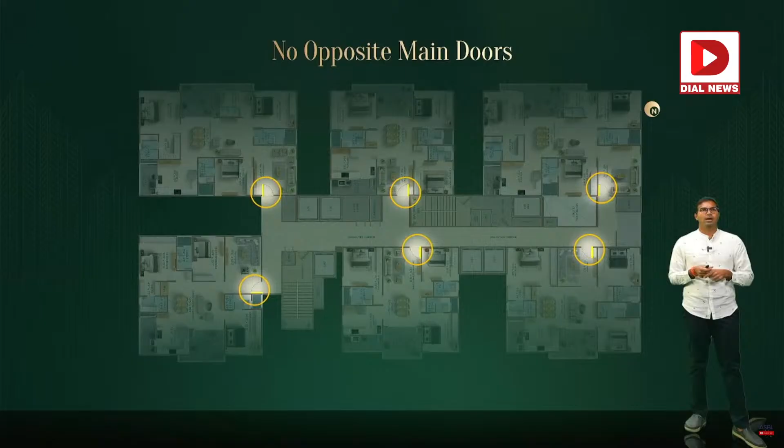Then we went to the next key aspect, where people are talking at a floor plan level, at a unit plan level. What are the key things which came up during our focus group studies and one-on-one interviews? These keywords emerged: lighting, ventilation, carpet area.

Let me share a story also. Most of our customers, if you look at the demographic and behavioral data, have traveled world over, mostly working in the IT sector, and traveled abroad internationally. So in our research, one question was: what is a good building for you? What is your aspiration? We did A/B testing, showing multiple images, and across various people, many picked buildings which were tall and had a glass facade - that was their aspiration. Another question was: which is your most favorite city? The three cities which came up were New York, Singapore, and London. When we asked what it is that you like about it, people said: tall buildings, glass facade, which looks sleek and tall.

So that's when we thought, okay, if this is an aspiration our customers have, then let's plan for that. How can we deliver on that? That's how the entire concept of curtain wall came.

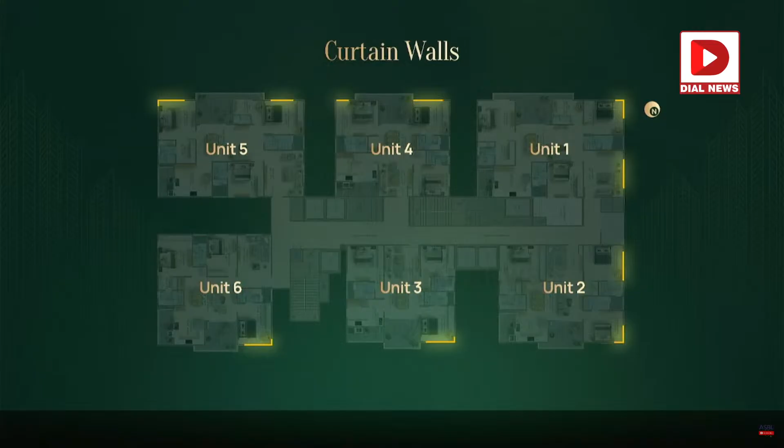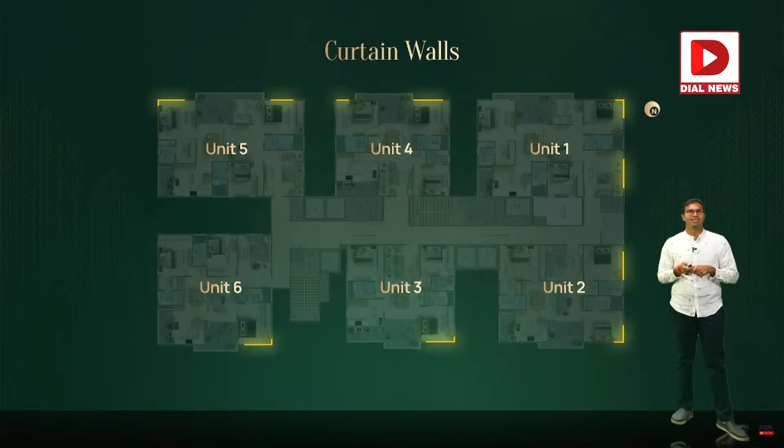So this is how the yellow line, what you have mentioned, that is where the curtain wall is coming in each of the units. In fact, in most of the units, it's coming in a minimum of 2 bedrooms, right? So that really enhances, in some cases it's coming in the kid's bedroom, so that really enhances the light and ventilation in those places.

Another important aspect which I wanted to pull up, which we have improvised in Broadway, again coming from product research and adding to the ventilation of the space as well. A taller space, you're going to feel much more breezy. You're going to feel much better aerated also.

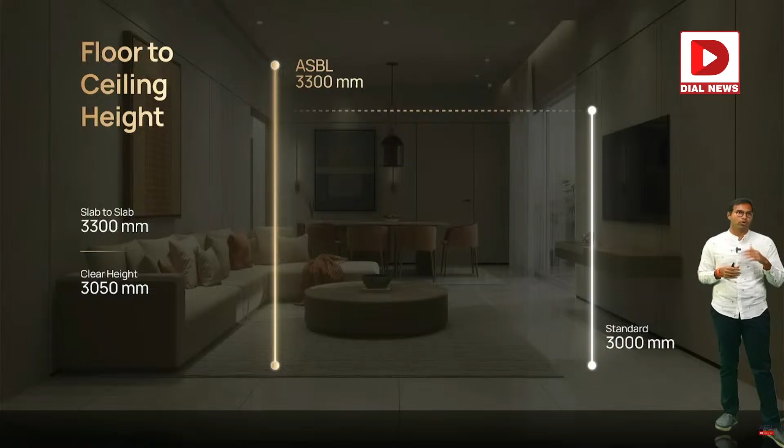So we have improved the entire slab to slab height. Standard, most of our competition is giving 3000 mm as a standard height from floor to floor. In Broadway, we have increased by 300 mm, that's almost 10%. So the floor to ceiling height is 3300 mm.

That is gross, so you can see slab to slab. Clear height is going to be 3050 mm. There's going to be a slab thickness of approximately 150 to 175 mm, and then another 75 to 100 mm of flooring and whatever mortar. And then you're going to have a clear height of close to 3050 mm. So that's roughly around slightly about 10 feet, if I'm not wrong.

Again, this also adds to the entire aspect of the space in your apartment.

Again, with the advantage of curtain wall, what's happening is all the other balconies have been converted into the room, thereby maximizing the carpet. And naturally, because we could increase the carpet, here we could negotiate and increase the balcony size, outdoor living size, which is almost 15% bigger than all our previous projects.

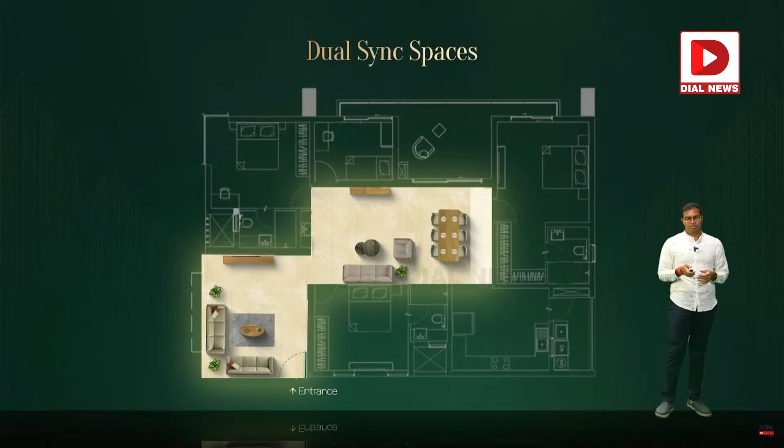Now let's get into the second aspect of the lifestyle grid: practical luxury. As I've mentioned, most of our customers are double income households, so both husband and wife are working, which creates a dearth of time. People have 40 to 50 hour work weeks and still need to manage the house, daily utilities, grooming, and more. So we came up with the concept of practical luxury, where all key day-to-day life utility services should be within 100 steps, within a minute's walk. That's practical luxury.

From our customer research, 82% of our customers are exposed to hybrid work. Some work full-time from home, some do hybrid work. We also have a good number of NRI customers who continue their work in the US, or continue working when they visit here for a couple of months. This has been a key bestseller for us: the concept of co-working space. We've given close to 9,780 square feet of plinth area for this co-working space, split into 2 levels.

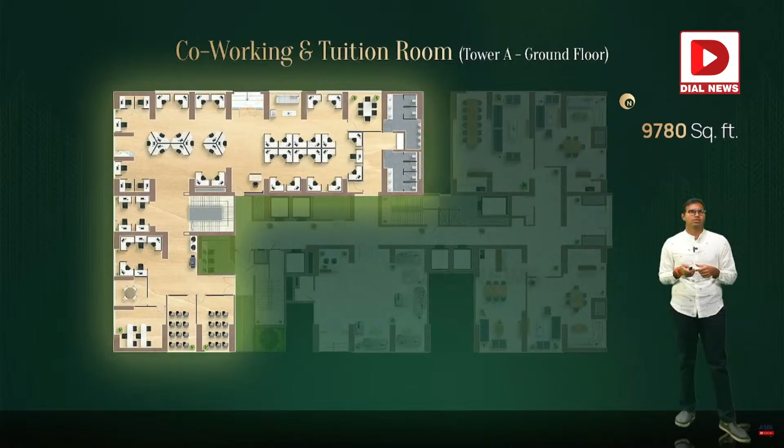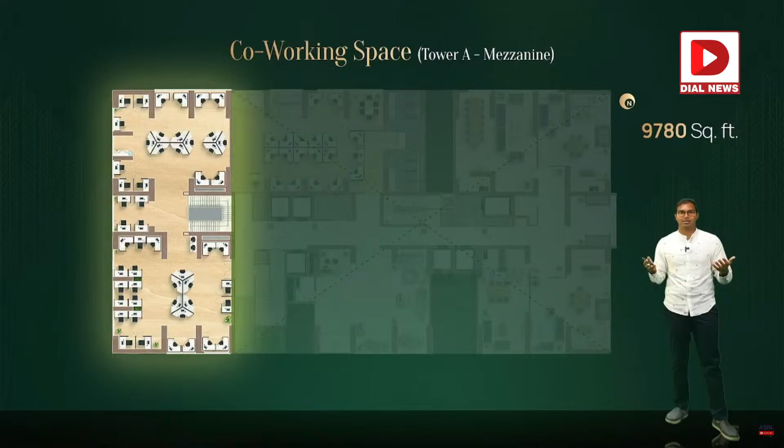This is located in Tower A ground floor, and a small part of it is located in the Tower A mezzanine. You can see the internal staircase, which you can use to go to the higher floor. The discussion rooms and minor level furniture planning will improvise over time, but this gives you a broad perspective of the space and its functionality.

Another important thing our households mentioned, coming mainly from the aspect of both wife and husband working, is that people need a space where they could put their valuables. These days, when people work Monday to Friday and there's a party on the weekend, you have to go to the bank to bring your jewelry, but there's no real time. You come back from office tired, and now you have to go to the bank, which might even be closed at that hour. So all these small things add up to a big pain point in people's lives, and we thought these facilities should be given here.

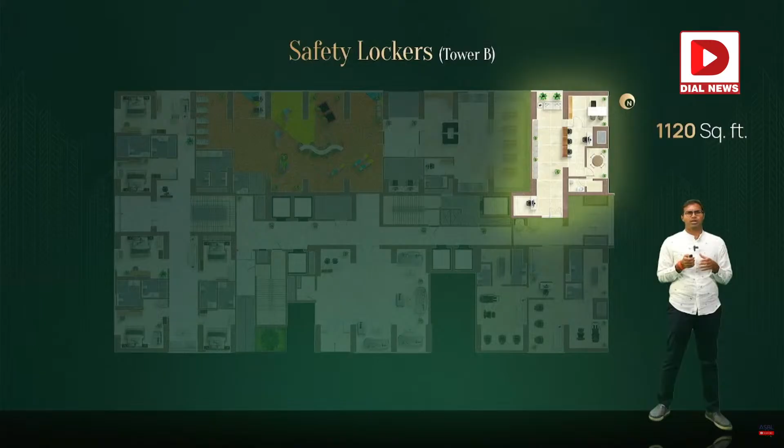This is located in Tower B's ground floor. Again, a very important feature which our customers wanted, especially our women customers, mainly from the point of storing jewelry, and even important documents these days people are storing there.

This again is just a stock image.

Next, another important thing is the entire aspect of grooming. Apart from monthly grooming things like getting a haircut or a shave, another thing we've been seeing lately is the aspect of people getting ready for marriages or any events, like a birthday party. There's a lot of service requirement, especially from our women customers, around saree draping and getting ready for events. So this spa and salon would be totally equipped to provide all those grooming and beauty services.

It's approximately 1,750 square feet, located in Tower B, right behind the bank locker. We are provisioning the space closer to the handover, and we'll be tying up with a vendor.

Whenever there's a party you're hosting or going to, you don't have to plan, go out, get ready somewhere and go. You can simply come here and get ready, or in most cases these service providers even send their person to your home to help you get ready. It's a very small thing, but very important. In fact, we take pride in designing these buildings around this nitty-gritty, just like how any car or phone has multiple features that make your life easy.

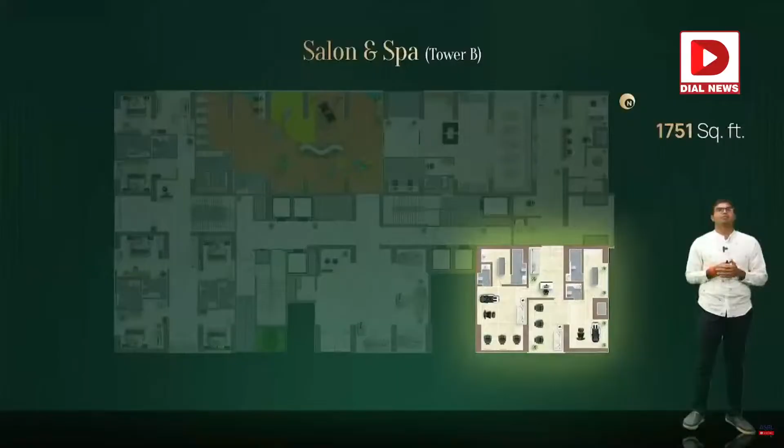Imagine living life without most of these quick commerce or e-commerce apps - how much more difficult would it be? Same way, I think the building as a product should deliver on multiple features, so I would see them more as features than amenities. This is again just a stock image.

Then there's our day-to-day utilities - the most important thing, the supermarket. We've seen that when supermarkets are right on the ground floor, people are more incentivized to come down to the shop and buy rather than ordering from home. You can simply come down - it can be a quick activity - in 2 minutes you reach, buy whatever you need, and go back to what you were doing.

It's approximately 1,430 square feet, located on the ground floor of Tower B. Again, a stock image of that.

Another very important aspect is the entire concept of medical office and physiotherapy. When we were doing product research and talking with our customers, kids get sick, and some customers who were more senior, around 45 plus, told us that their parents stay with them, and most parents have some sort of physiotherapy needs.

Because that service isn't conveniently available, people don't end up doing their necessary physiotherapy activities, which causes a strain on their physical well-being.

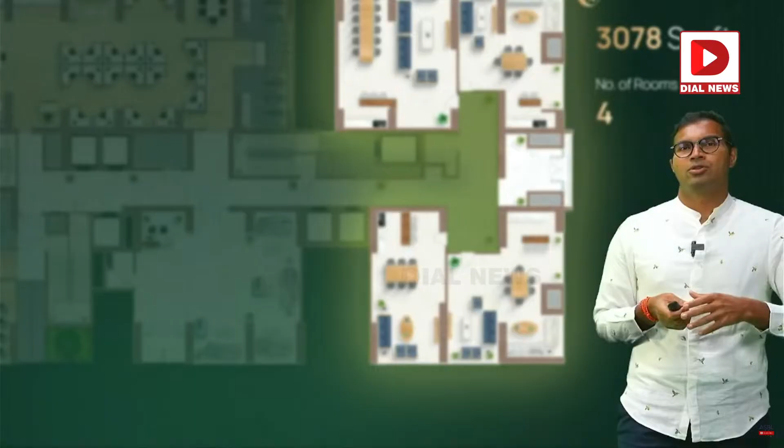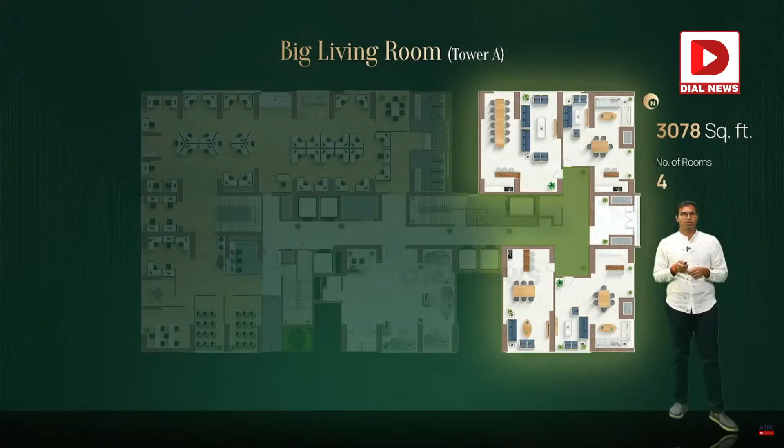Something very important we've realized in this day and age is people are socializing this way - smaller groups but more frequent. Most of us have friends over the weekend, that's how frequent it has become. Unlike in the past where it used to be less frequent but bigger groups, now it's smaller groups, more frequent. People can book this space using the app and use it. We found this could greatly enhance the lifestyle of our community members.

Next, another thing we've seen, as I mentioned in the beginning, close to 64% of our audience group in this project are people in the 0 to 7 year age group. One of the key features we were further talking about for this kid's aspect is the entire concept of birthday celebrations.

If you actually see, the first birthday or third birthday is what most people have told us typically has a larger gathering of maybe 150 to 300 people, but the rest of the birthdays, it's typically a small gathering. Most cases it's just the kids' school friends or the colony or community friends who come over, so frankly it's a 30 to 40 member gathering. This kid's birthday is the most commonly used party situation.

In some cases, the big party hall, or the multi-purpose hall, has some other event, then the kid's birthday party cannot be celebrated. Frankly, it's very small, typically around 25 to 30 people, mostly kids. So we thought, given this community has many kids in the 0 to 7 year age group - and what we've seen is post 7, typically these birthdays come down, and once kids reach teen, parents have told us they typically celebrate with their friends, going out to a mall or something - given there's a significant number of kids in the 0 to 7 range, we gave a dedicated, separate kids' birthday party area.

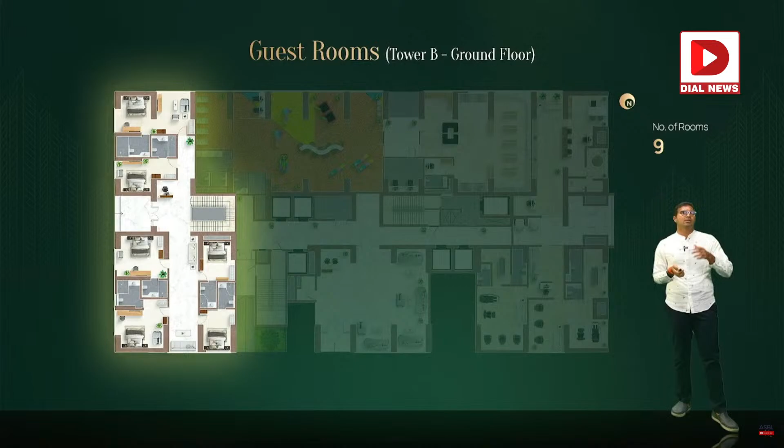So guest rooms are something we came up with a good ratio for. We have 9 guest bedrooms, so availability will be much higher. This is spread across 2 levels, the ground floor of Tower B and the mezzanine. This is the ground floor plan, this is the mezzanine plan. All of them are located on the podium level itself, so that even your guest doesn't need to know the map of the clubhouse or which floor or corner to go to. You just come down and you'll find it. It's very intuitive planning, I would say.

Next, located in the clubhouse, we have a giant banquet hall with a pre-function area and a pre-party kitchen. You can't cook there, it's not allowed from a safety standpoint, but you can do preheating and plating. So this comes in the clubhouse, where you can host bigger parties and have your guests come over.

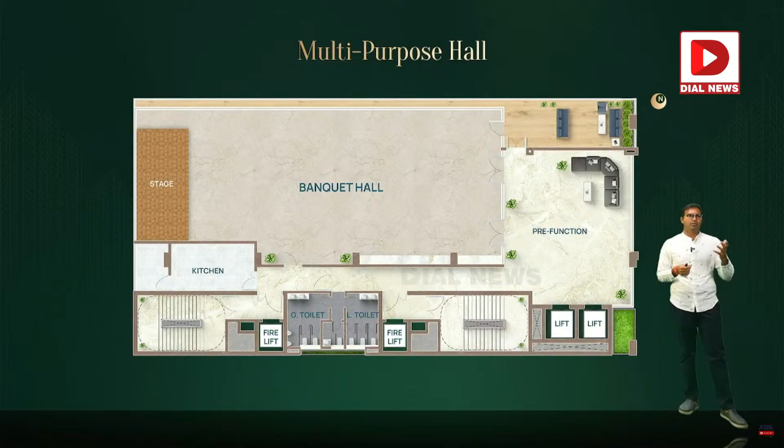Another very important and interesting thing, something which is my favorite in this project apart from the big living room, is a curbside cafe. This was inspired by extensive travels to Singapore over the last 2 years when I started learning more about product design, and also New York, though I haven't been to London much. One thing I saw that usually improves the quality of life in these big cities was the entire curbside experience - curbside cafes, restaurants, with a lot of people moving in and out. The entire vibe gets really, really cool.

So this idea was inspired from my travels to those places, and we have given provision for 2 F&B spaces with their respective kitchens. One is closer to handover, we'll float it out so different vendors can come and take it. This is a curbside cafe, so people are expected to walk to this place from the nearby neighborhood. Even outsiders can access this space, which I felt was very important, because when we came up with the concept of cafes and F&B, it usually premiumizes your space, improves the property value of the area, and even the quality of life for residents.

Imagine you're not cooking that day, you just want to go down and grab something. So you can come here.

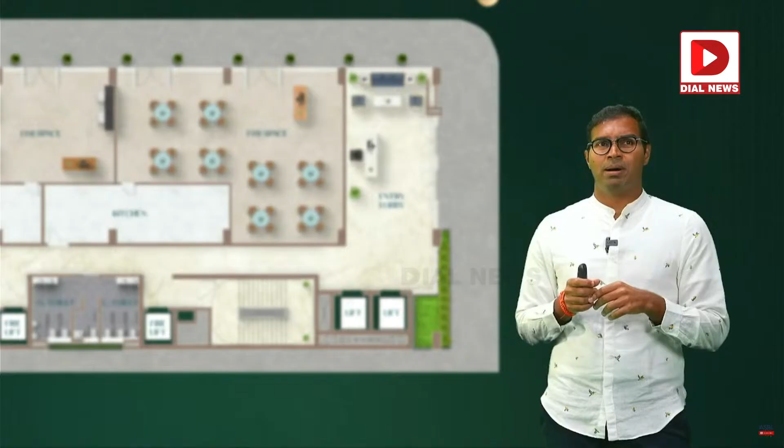But the con we were seeing is that in most communities where F&B spaces are given, all of them shut shop. When we spoke to facility people there, they told us nothing really runs, after 6 months everybody shuts shop. When we looked into why, the problem was store-in-store - meaning they were only allowed to sell to residents. And how many residents will you have? Like 885 families. How will the business run with only 885 customers? It won't run. So that's why we planned it so outsiders can also come and use it, and residents can come and use it too. Even the entire security arrangement has been done keeping this constraint in mind. This is greatly going to enhance the entire street life of that road, not just the Broadway project.

There are a lot of apartments coming up in that road, right? So everybody can just come down, grab a coffee, and then there's co-working space. Imagine somebody working out of that wanted to discuss some idea with a friend or colleague, they can just take this idea into this cafe here. We've seen that a lot of co-working spaces thrive when there's a cafe environment in the vicinity. So the key thing we took in mind is that each space should really benefit the other space. It's not like isolatedly giving spaces.

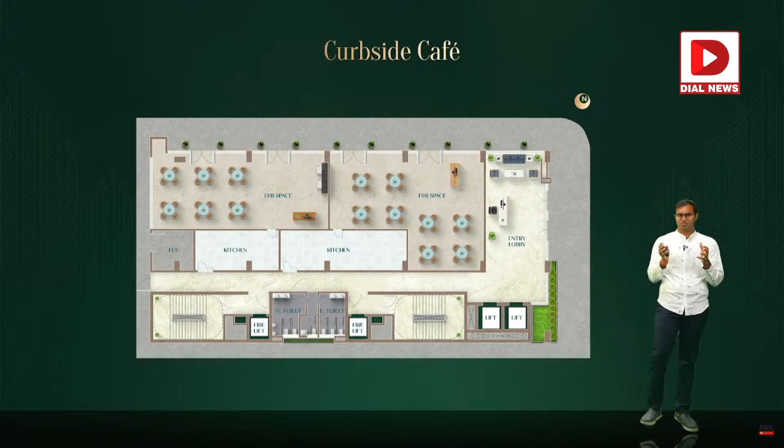So how do we make sure the space gets used? It's not just that as a builder we design the space, hand over and go. If it doesn't get used, it's not really going to enhance the life of our customers. So in our research we thought about how that ecosystem can thrive. Most co-working spaces thrive when there's coffee in the vicinity, and most coffee shops thrive when there are co-working spaces in the vicinity, where upcoming entrepreneurs or people working from home come grab a coffee, or meet somebody here. This is the new trend that's been coming up.

Again, a very important aspect of the social life, the curbside cafe. Here are some stock images of how it looks, and in all major cities in the world, this greatly enhances city life. This would enhance the life in that entire road, the Broadway 100 feet road, because there's a loft coming up there, and opposite projects too.

So everybody can simply walk, they don't even need to take out your car. I'm a big fan of walking neighborhoods. To have a walkable neighborhood, first you need to have a footpath. Second, you need to have activities or spaces where you can do activities. And restaurants are very, very important - they add to the entire buzzing life and vibe of the street.

Here are some stock images to give you an understanding. Next, the important aspect has been the fitness zone. Something very important these days - the entire aspect of fitness and wellness is no longer a luxury. It's now become a comfort, more of a mandatory item. It's no longer a wish list - today it's mandatory. If you look at the earlier audience research we published, majority of our customers are tech workers.

When they're tech workers, there's a lot of sitting, and now they say sitting is the new smoking - it's not really advisable at all. So the entire aspect of fitness and well-being, physical well-being, is something very important. We really wanted to spice up this entire thing, not just keep the monotony.

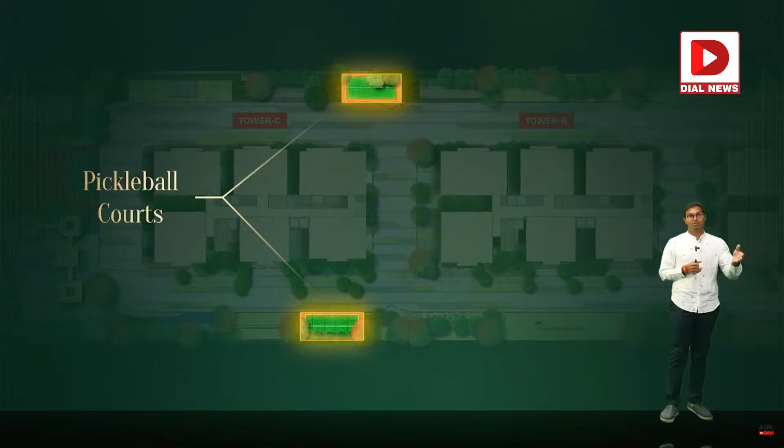In sports amenities, something quite the rage these days - a running trend - is pickleball courts, which are popping up everywhere in different neighborhoods, with people booking them and playing. So we're giving 2 pickleball courts in the community, so people can come down, book and play. When I did research on pickleball, we found that a lot of people were having minor injuries - that was also one trigger to have a physiotherapy studio on the facility. So in case, God forbid, you have some injury, there's a physiotherapy place right there - you can heal yourself in maybe 10-20 days and start playing again.

And then we have 3 indoor air-conditioned badminton courts located in the clubhouse. Badminton is also something a lot of people locally are big fans of, and many people play it. So it's indoor air-conditioned badminton courts located in the clubhouse.

Next, we have cricket nets. A lot of our younger children, especially those who are 7+, have asked for this. Another interesting thing, when we spoke with customers who are 50+, a good number of them told us they played cricket when they were small and left it for the last 20-25 years, and now want to get back to it, probably with a coach to learn something. So we're giving two cricket nets spaces, and then one full-fledged basketball court, something very used by our teen and preteen kids.

This comes on the podium. This is one of the renders of that space.

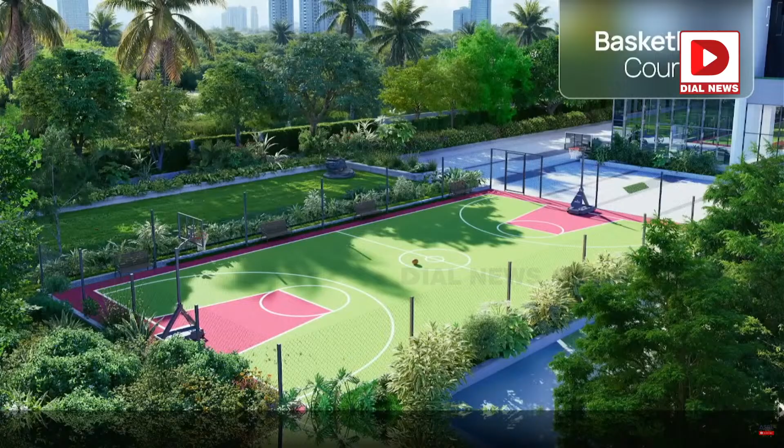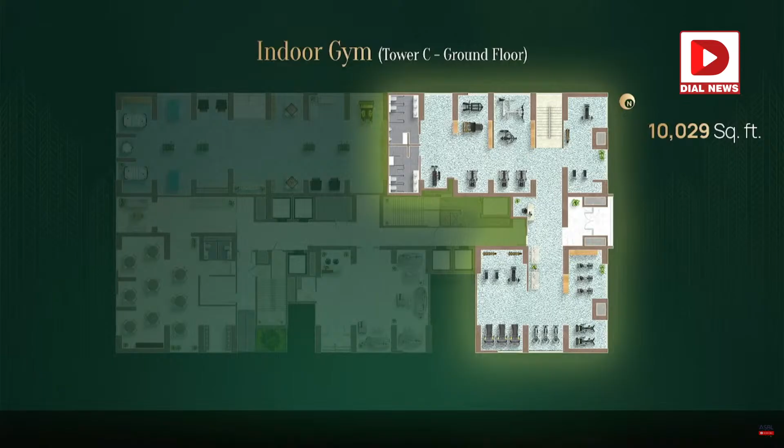Next, you have the fitness zone. This is more like indoor workouts, what you might call typically a gym. The gym is close by, again on Tower C ground floor. It's very important for me personally that we put all the spaces on the ground floor. That's been vital to my design language over the last two years, because there is an 81% drop in footfall the minute the space moves from ground floor to first, second, third, any floor. So we want people to use this, and we want the entire podium level to be buzzing with people and have a great community vibe.

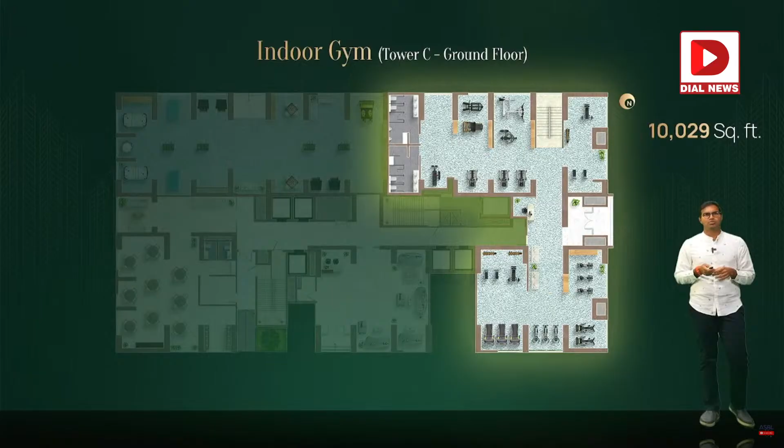So again, this is located in Tower C ground floor. You can just wear your shoes and come in 100 steps and you'll reach this place. It's close to 10,000 square feet, making it one of the largest gyms in its category. It's on the ground floor, and there's another one on the mezzanine level. Both are in Tower C.

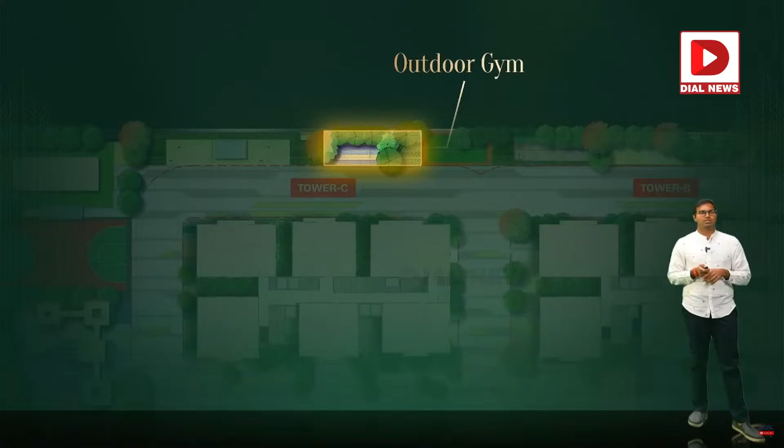Stock image of gyms. And then, something we mainly see our senior age group audience do, an outdoor gym. We've seen people using this a lot, for basic stretches and such. So there's an outdoor gym mentioned right outside the indoor gym, again on the podium.

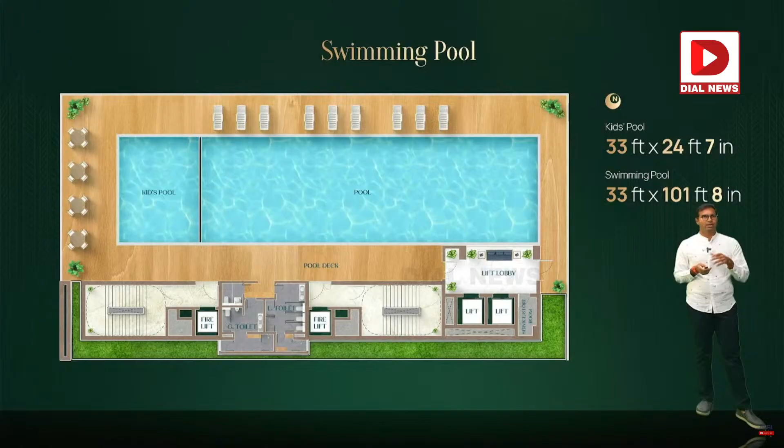Swimming is also a very important sporting and recreational activity. In fact, when we were speaking with the physiotherapy consultant during the research phase, there was a lot of water-based exercise recommended to people to heal themselves. We have a separate kids pool, approximately those sizes, and a giant adult pool which is 33 by close to 102 feet. It's located in the clubhouse. This is a small render.

Then again, multi-purpose, multi-sports turf, something picking up a lot these days, turf grounds in the city which people book and go play with their friends. So we have provided one giant turf ground on top of the clubhouse, where you can play box cricket and even a mini sort of football. This is mainly designed for multiplayer sports, engaging at least 10 to 12 people. That's located on top of the clubhouse.

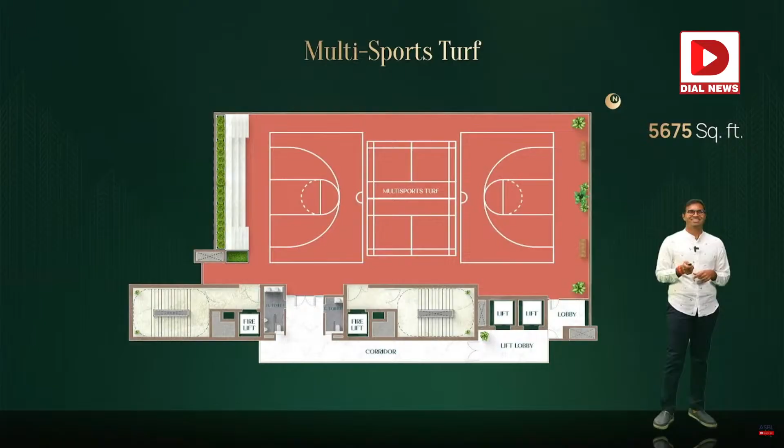Right now, let me talk about the final thing, the childcare aspect. As I've mentioned earlier in the demographic and behavioral data, a huge number of our customers, 64%, have kids in the age 0 to 7. Almost a third, around 33%, have kids who are just born or are in the planning phase. So this coincides with the trend of double income households, where parents have less time and are more engaged with their work.

I've seen that parents spend a lot of time dropping the kid at their creche or play facilities, losing a lot of time in that way. So we wanted to bring in the aspect of convenience so they don't have to do all of that. Another thing when we spoke with young mothers is that there's always this thing at the back of their mind about how their kid is spending time at the creche, whether they're liking it there, how the facility is treating them.

In this project, we've provided the creche on the ground floor, and the co-working space is also on the ground floor in the other tower. So the mother can go and see the child in like 1 or 2 minutes, greatly enhancing comfort and convenience.

So then I got the idea that, why am I taking my kids once in 15 days? What if they could go there much more frequently, because a good number of them have role-play based playing and all of that. It really engages that particular age group, essentially 2 to 7 or 2 to 8ish. So that's when the aspect of convenience came in.

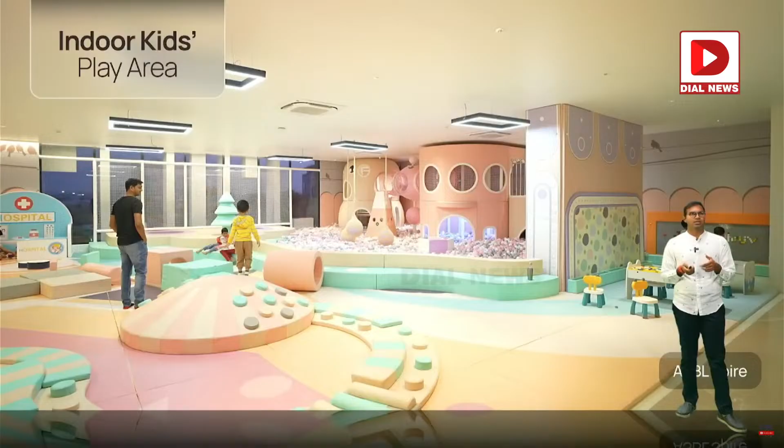So can we bring in this play zone, typically found in malls, into a community? In fact, we are the first people to do it, and we have done it in the Spire project. These are the actual photos from the project. It's always full of kids. This has been the space most used by the community members. You will always see kids playing around in that area.

I would definitely recommend parents that you please make sure you use the guideline of how to use it. Sometimes I see people running with their shoes, it will spoil the material, but anyways, that's for a later day.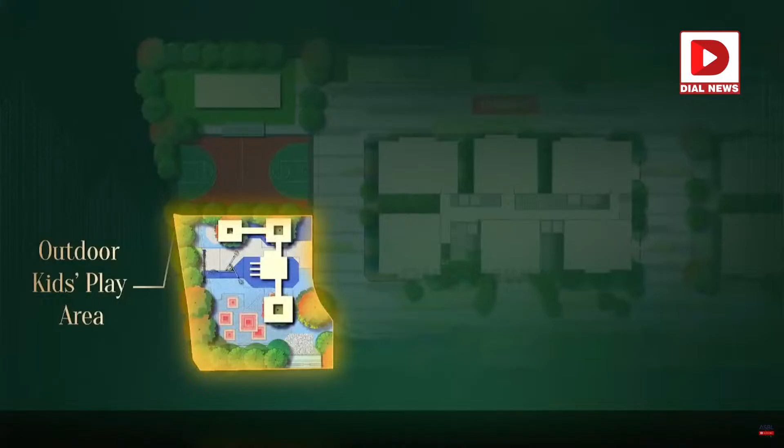So this space is something we have seen hugely engage our kid customers. This is given close to, if I may iterate, close to 3,500 square feet, located in Tower C ground floor. If you look a little down in the plan, the kids' birthday party area is also there.

When we went to these kids' play zones and did research, most of the times these play zones get booked out for kids' birthday parties. The typical birthday party theme these days is that you invite kids and friends to the play zone, they play for a couple of hours, then cut cake, eat snacks, and go. So that's the level of detail with which we designed this.

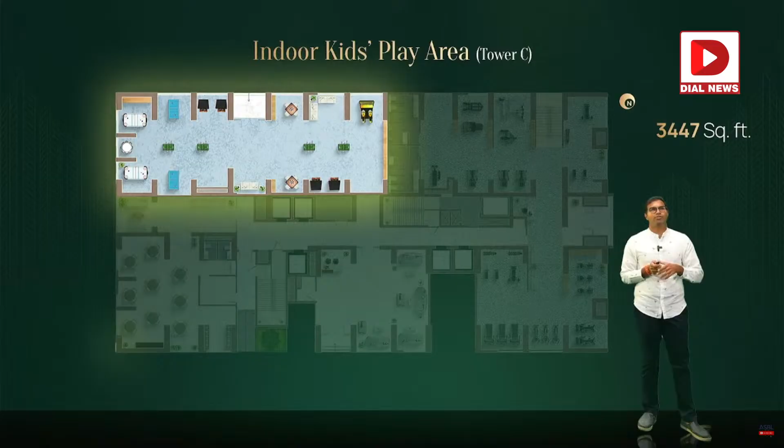The birthday party hall is also right below the kids' play area, so they can easily play here and then go to that place and do the rest of the activity there. The entire sequential space planning is something we really put a lot of effort into in this project.

And then the outdoor kids play area. There's also a big space right outside behind Tower C, specifically catered to the kids.

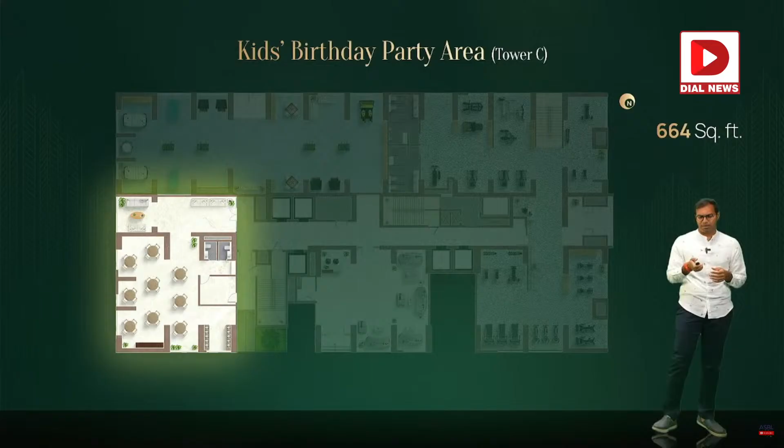Outdoor kids play area. I think it's just reiterating the kids' birthday party area I mentioned earlier. The kids' birthday party area is sandwiched between the indoor play zone and the outdoor kids' play area, so their school friends or whoever can come over and have a great time here. Typically these are smaller groups of 30 to 40 people, so they can quickly finish that activity in 2-3 hours, and it's probably a much more engaging and better way to do it than in a multi-purpose hall. Imagine that's on the first floor, where will kids run and play? So this is the entire concept of sequential space planning.

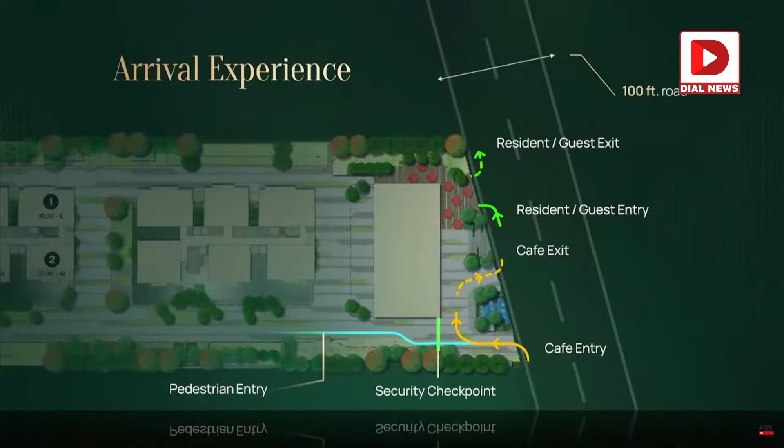One other thing I really don't like, or rather, what I've seen in my travels to Singapore and New York is that buildings are really approachable. You can easily get into them. You don't have giant gates or walls pushing away people from the neighborhood. So we wanted an approach where the building reveals itself smaller, with great entrance spaces, but you can see inside, go inside, because frankly the F&B will really thrive on great footfall.

If you have a good-looking space, that's great. That's usually going to increase the footfalls. Greater footfalls, better business. Better business, you're going to have a better service provider.

Better service providers give more utility for the customers staying there and for customers on that street, which will increase the property value. I'm actually doing research on quantitative data - how the number of restaurants really increases property prices in an area. There's a good correlation, so we're researching that. More restaurants increase footfalls and enhance the entire experience of that particular street. So you can see the entire main part is designed to be very welcoming, so anybody can come and use the F&B spaces without losing the aspect of safety and security.

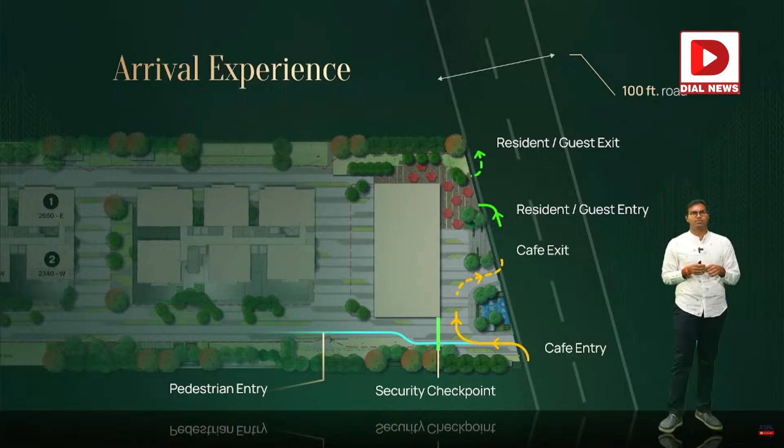If you go a little down, you can see the resident and guest car entry and car exit. If a resident is walking into the building, that's what the blue line indicates - the pedestrian entry. And you can see the green thing - the security checkpoint. We made sure that people coming for the F&B space do not enter the building premises, keeping it safe. A similar barricade would be set up on the other side of the clubhouse too - it's not mentioned in the drawing, but it would be there, so those restaurant users do not come into the building.

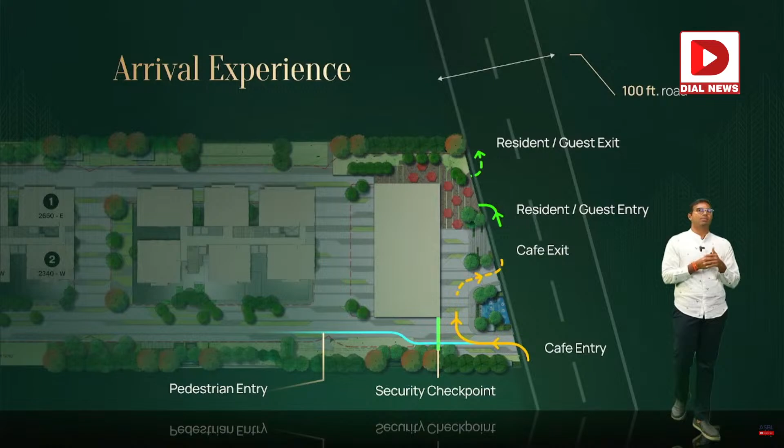We wanted to briefly discuss the basement plan. We've done a small graphic of how cars can move from basement 1 to outside. Another important thing - the entire vehicular entrance into this building goes directly into basement 1, so you don't have to come to ground and go down each floor. You directly come into basement 1. So people in basement 4 don't need to climb 4 basements up to reach the road - you just have to climb 3 basements. I'll play a small graphic of how it's going to look.

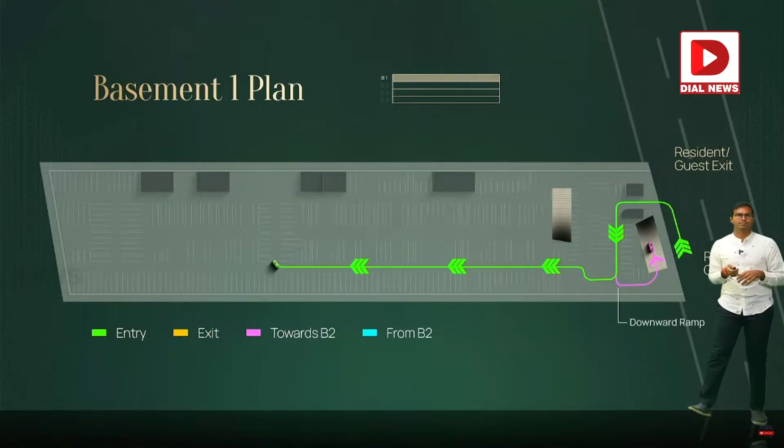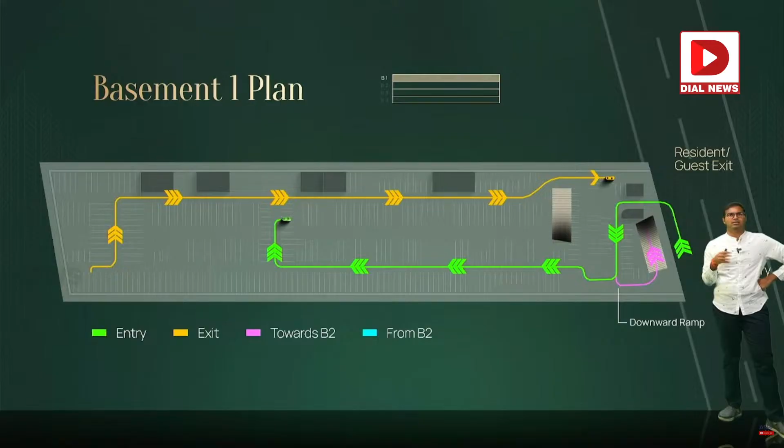The green is incoming traffic, and the golden line is outgoing traffic. You see the ramps - upward ramp and downward ramp. A similar setup exists if you are in basement 2.

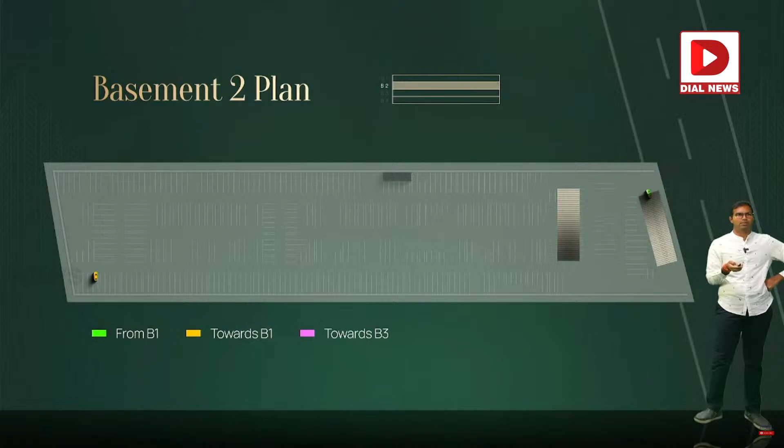Does it play? You can see this - again, a simple, pretty well thought out traffic plan where people can easily come in and go out. You have one dedicated downward ramp and one dedicated upward ramp, so you don't get confused. It's a similar thing repeated for each basement - self-explanatory. Let me go to the next one - again, if you're in basement 3.

I've covered most of the aspects - briefly told you how the entire product and our audience research led the way into product design. We really take pride in this style of working. The product design has to be top notch and done via research. We need to know who the customer is, design for the customer, and accommodate as many lifestyle features as required. Not everything might be possible, but we do whatever we can within the constraints.

Before I go on, I'd like to give a brief about the Clubhouse. I know most of the Clubhouse features I've already covered in the lifestyle grid, but I'll quickly run you through so it can be seen in the Clubhouse context. The Clubhouse is 52,000 square feet and it's a G+5 clubhouse. This is how it's going to look.

At the ground floor, you see the entire F&B space. We have made sure there's provision for 2 kitchens, so each of the F&B spaces has their own kitchen. At a later point of time, we'll be signing up the vendors.

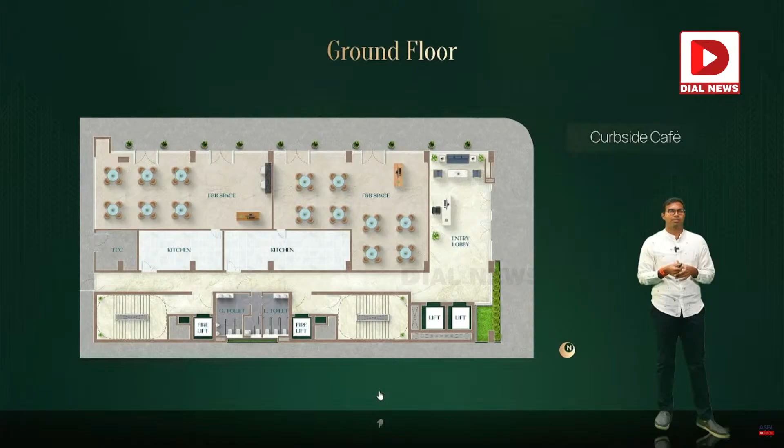Then you see the Clubhouse entry lobby and entry space, which is exclusively for the residents. From the F&B, there is no access to that without crossing the security check. Somebody can cross the security check and get all the necessary approvals and come in if they're a guest or a resident. So this is the ground floor plan.

This is the first floor plan - pretty simple, intuitive and elegant spaces. When you get onto the first floor, you have a large banquet hall with a pre-function area and a sort of outdoor veranda balcony area. So this is if you want to host any larger gathering. We made sure we gave - it's not a kitchen, I would say it's more like a pantry area for prepping. We will not allow people to cook here because there will be safety hazards and we're not supposed to, but they can do their plating and the pre-setup.

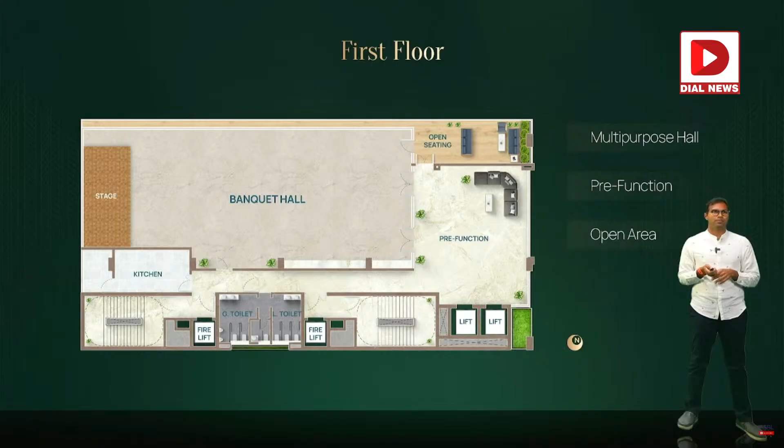Second floor is not mentioned because it's essentially the downward side of the pool and all the pool pump equipment - that's why it's not mentioned. It's more like a utility space for the pool. But the third floor is the pool.

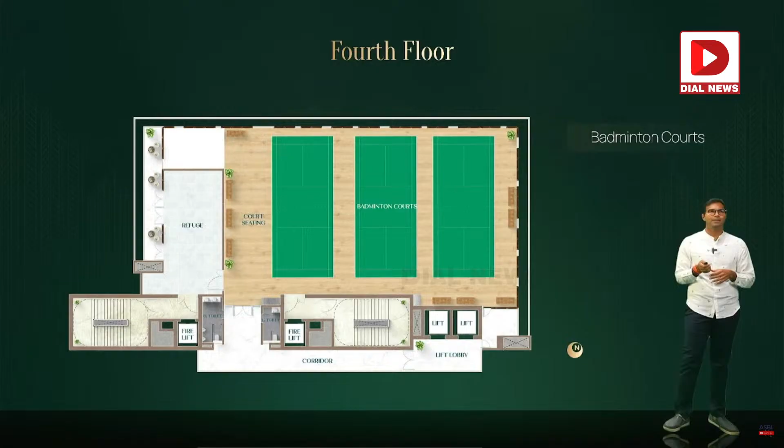The sizes I've mentioned earlier - it's pretty much one of the biggest for this category of product here. The fourth floor, as I mentioned earlier, has the badminton court - an indoor air-conditioned badminton court, 3 numbers. People can book and use this facility. Then on the mezzanine level, on the 5th floor, you have indoor games, which is more like TT and billiards and stuff like that, and it overlooks into the badminton court also.

And the Clubhouse rooftop is simply a multi-sports turf, right? So that's your Clubhouse. I thought I'll cover another important topic also.

I'm planning to make a few awareness videos on how the entire billing, metering, and frankly the utility management aspect happens in our communities, and mostly in most gated communities. So essentially, the three most important utilities are gas, electricity, and water, and in this community, all three are metered and prepaid meters.

Matlab, you pay first, and as you use, the bill gets adjusted. This is mainly done from the point of view that people do not free ride. Nobody likes if another member of the community free rides, and frankly, it's not even the right thing to do, and that will kill the entire maintenance of the building. So everything is prepaid meters, and of course you can pay them online via the app, and it will give you alarms when the balance is low.

Another thing I would like to point out is there is flat level billing and there is common area billing also. Let's take the case of electricity, since this is the most commonly used topic area. Every month the electricity department issues only one bill to the entire community. Let's say that bill is 100 rupees. Now how does that 100 rupees get collected from all the people in the community? How do we do it?